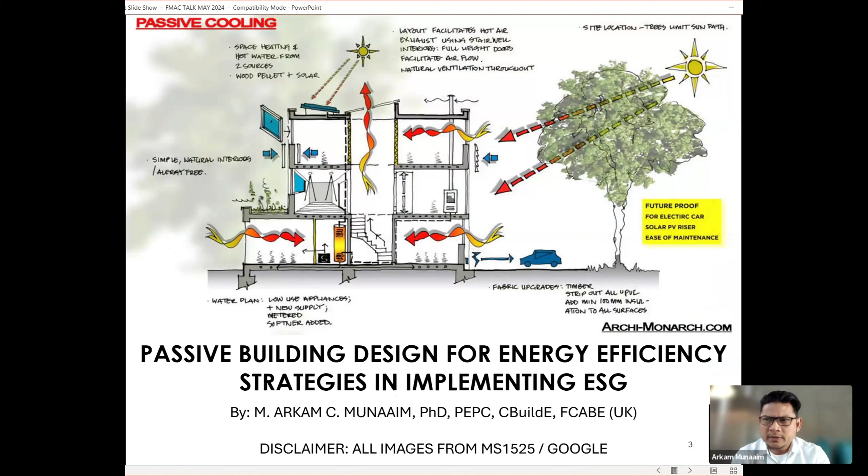So here's the topic again, just to give an insight into what we'll cover. First, we need to talk about passive building design, particularly focusing on energy efficiency. But our main theme today is really regarding ESG. So what is ESG? This is a standard definition you'll get if you Google ESG. One of the aspects is green building design and operation, and climate risk mitigation. Related to that, we can talk about energy efficiency, water conservation, emission reductions, and waste reduction. This is all related to environmental issues regarding the operation of buildings, not only operation but also construction.

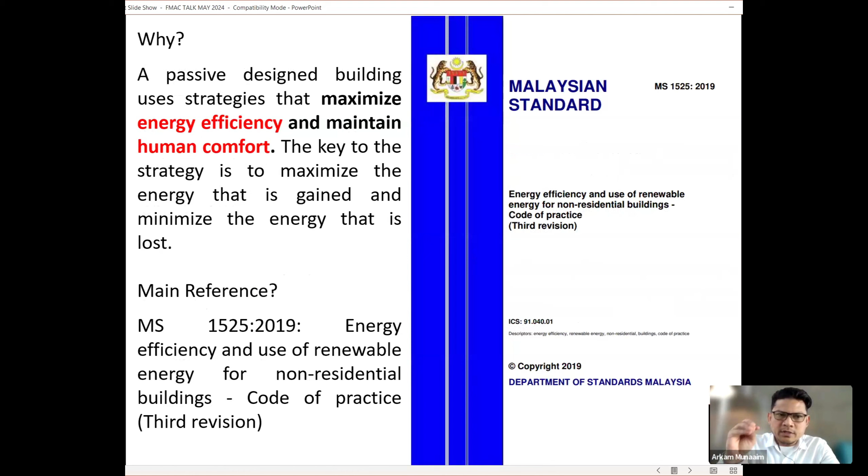So we will talk about these two more - energy efficiency and also human comfort. Talking about human comfort and indoor environment, perception about the indoor environment is closely linked to health, well-being, and productivity. Research has been made to prove that human comfort in a building is very significant to the health, well-being, and productivity of our occupants or us as building users.

Improvement of comfort level in a building has a significant positive impact on occupants. Human comfort in the indoor environment can be assessed in two ways - we have at minimum two comfort zones. Actually there are many, we can put 4, 5. Some books refer to 5, some refer to 3 and 4.

But I will just focus on these two because the topic related to EE today: thermal comfort and also visual comfort. Thermal comfort takes into account a range of environmental, work-related, and personal factors when deciding what makes a comfortable workplace temperature.

So we want to make our temperature or workplace temperature close to human comfort. Human comfort ranges because it depends on human activities. Sometimes my comfort may be about 23 degrees C with aircon, and maybe 27 degrees C without aircon.

Other persons might have a different comfort zone, but we need to be as close as possible to the majority, so that some of the minority discomfort can be adjusted through work-related and personal factors in deciding what makes a comfortable workplace temperature. So what is the comfortable workplace temperature?

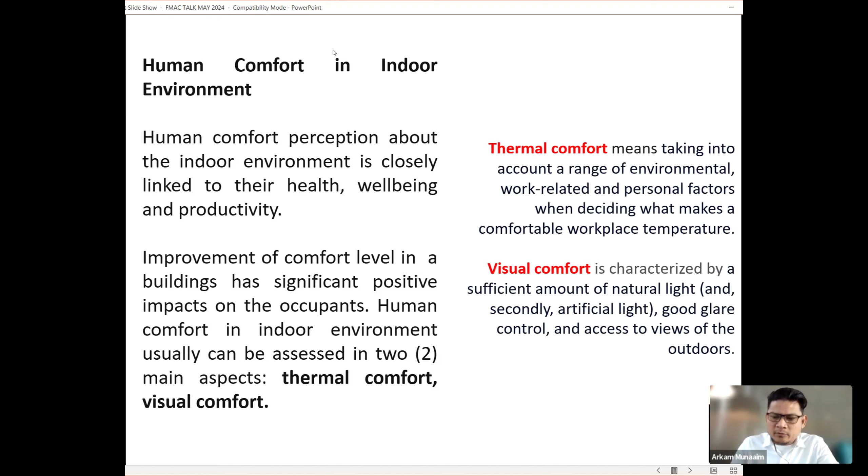So I believe they will share good insights coming from research about this topic. Then we need to understand what is actually the tropical climate, because tropical climatic conditions play a role in influencing how we make our own design. There is also a definition from Wikipedia: a tropical climate is the first of the five major climate groups in the Köppen climate classification, identified by a letter A.

They start with A—Af, Am, As, and Aw—related to the kind of tropical climate we have. Because even within tropical climates, each individual tropical climate also has its own specific characteristics or criteria not found in other tropical climatic conditions. Tropical climates are defined by a monthly average temperature of 18 degrees or higher in the coolest month, and feature hot temperatures all year round, like what we have now in Malaysia. In fact, in the last one or two months, we have had very high temperatures.

We can reach about 40, 41, 42 degrees Celsius here in Malaysia. Annual precipitation is often abundant, we have a lot of rain in this tropical climate, which shows a seasonal rhythm but may have seasonal dryness to varying degrees. There are normally only two seasons in a tropical climate.

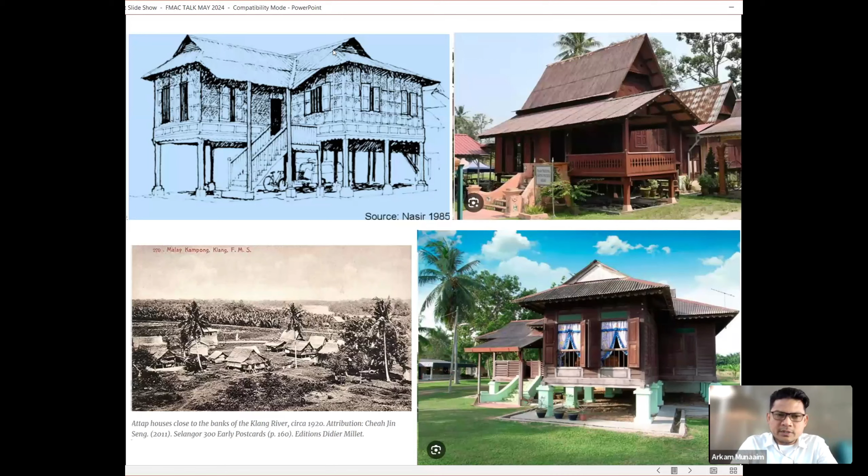So this basic design and understanding actually existed starting from close to 150 years ago. We can see this in the previous design of our houses. Here's a close-up of one of the houses, showing how it was built.

This is actually a modern picture of a fairly old house. We can see how it's put together, and at the back they started to construct a current practice, because now we have air conditioning to correct that part of heating. Other than that, it's still attached to the original building, and the second part was clearly just constructed less than 20 years ago.

This is what we can see from our previous generation, who made their environment part of their strategy for comfort at that point in time. Of course now we have more technologies, research, science and other features to add on, but for that particular time, this was a remarkable achievement for our previous generations.

So, there is some background to understand human comfort in home design. This is the current chart regarding the comfort zone. When we talk about the green area here, this is what we want to achieve: relative humidity from 20 up to 80, and temperature between 20 to 27, considered comfort. Other than that, we need to go for passive devices.

For example, starting by color here, passive solar heating. We need passive solar heating when we have this condition. And also we have the red one, we need to go for the cooling condition. So stop a while, I need to answer this call, very short one.

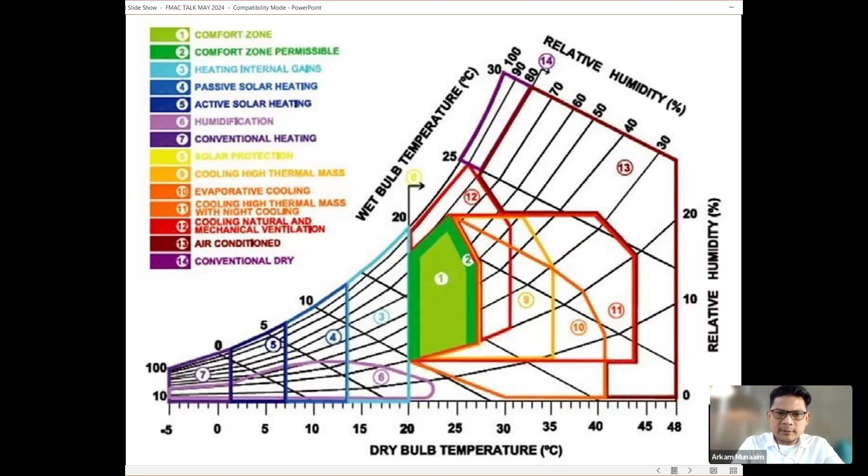Other than that, we need to add devices in terms of passive device to interact with the condition, so that we can get back the comfort by adding active devices. Okay, let me close this one too.

Evaporative heat exchange, direct evaporative cooling, for example. So here, what we can see is how we can use, for example, water pond and also vegetation to cool, to have cool air coming into our building or house.

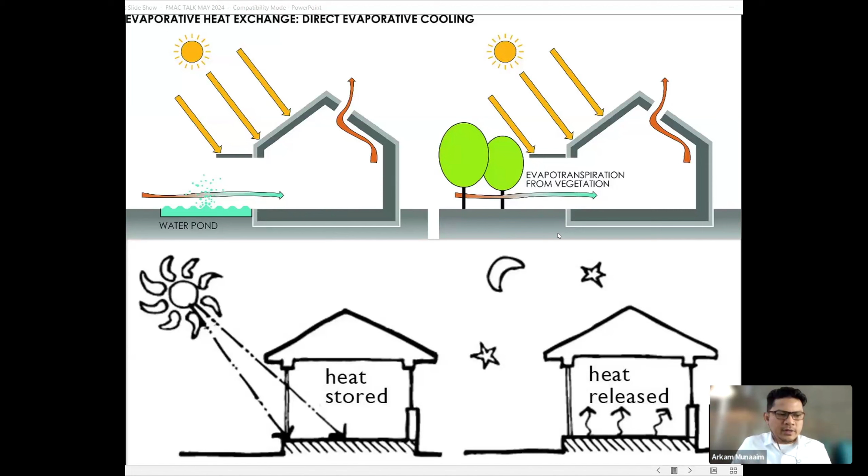And then it will be transmitted through whatever opening we have inside the building, particularly at the roof side. The cool breeze air coming in, and then hot air will be going up. So this is a sample of how we can reach passive design inside the building through evaporation, through water pond, or even vegetation. Very simple approaches and yet effective.

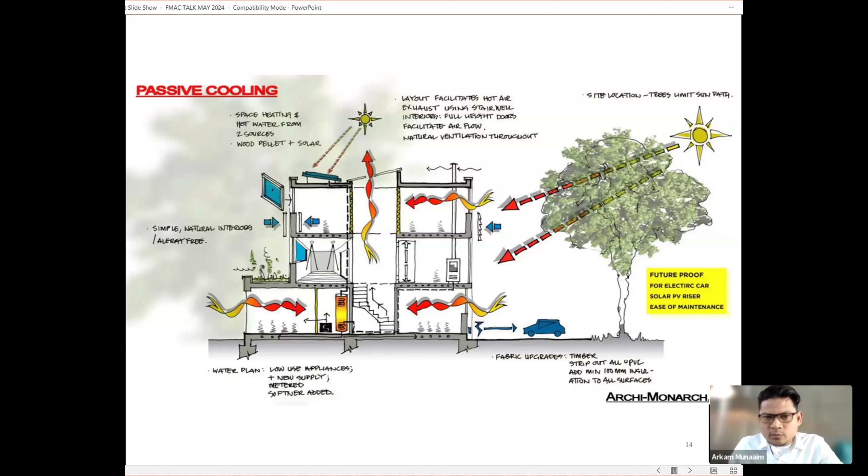Next, passive cooling also talks about how we want to implement the segment of the buildings and put it into a visual. There we can have ventilations everywhere coming through these windows, going up through stack ventilation, going out of the environment back. So things like this can be assessed, can be measured, and also can be designed. We have many simulations to do this part nowadays too.

Okay, glare control. Of course, we want to have good control in terms of glare. Things like bounce effect from the sunlight will affect our own comfort too. So this is how the things happen. We will discuss how to mitigate it in this session today. So this glare causes interruptions in terms of building comfort.

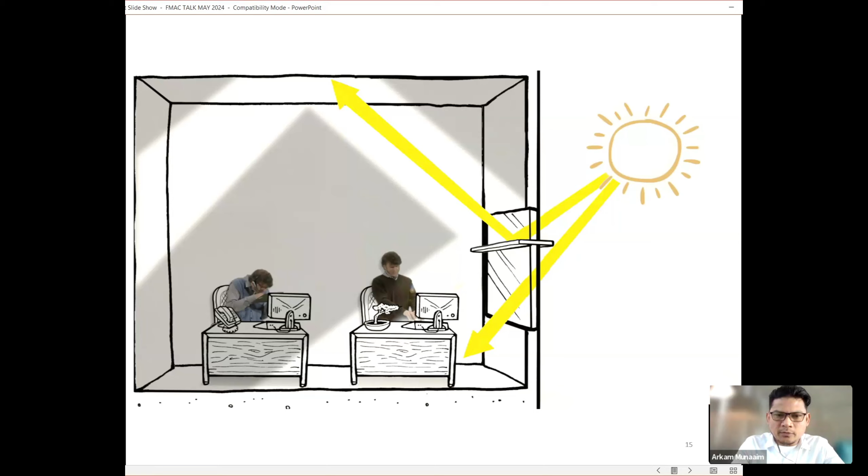Now, glare from artificial light, same thing. Our artificial light is so excessively bright that we cannot deal with it. Our eyes cannot deal with it too. So that is where we need to use the science behind it on how we can minimize these things.

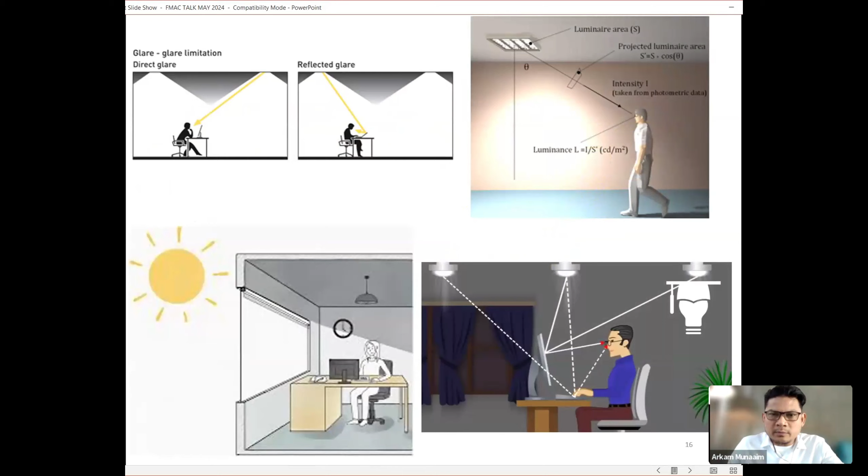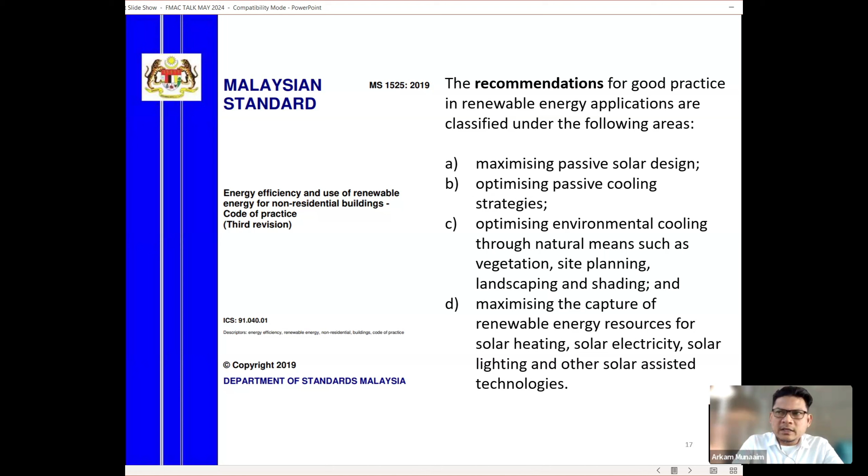We know about the recommendation for good practice in renewable energy applications, classified under the following areas. Maximizing passive solar design - we have four main strategies on how we can make use of the closest environment to our building: maximize passive solar design, optimize passive cooling strategies, optimize environmental cooling through natural means such as vegetation, site plan, landscape, and shading, and maximize the capture of renewable energy resources for solar heating, electricity, solar lighting, and so on. Even though some of the RE will also contribute into this ESG principle at the same time.

The requirement for EE, meanwhile, are classified under the following areas. So first of all, we talked about the recommendation on RE. This one is recommendation or requirement on EE, energy efficiency, classified under these following areas: design an efficient lighting system. Because according to research, about 80 to 90% of building occupants, not only building but whatever the building users, need to switch on the lights during daytime too.

80 to 90%, so there is a lot of energy that can be used. If you can have a very efficient lighting system, this can be minimized.

Minimize losses in electrical power distribution equipment. There are losses in terms of copper loss, efficiency loss, power factor loss. All those kinds of losses need to be minimized as well.

Design an efficient aircon and mechanical ventilation, because we just put the aircon there. We don't realize how to make it efficient. And secondly, go back to the users also. The users need to be wise enough to know how the aircon should be used.

Design a good energy management system that can be used or monitored through our own systems. There's a lot of software, a lot of programs sold to monitor our energy management system. They have a dashboard to monitor all those.

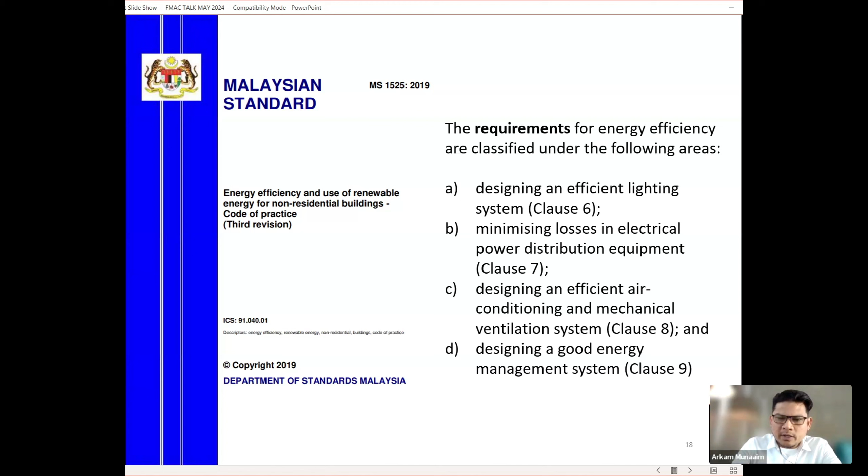Okay, then we go back to the sustainable design approaches. We talk about architectural and passive design strategies. Design within the contextual climate and site as the first step to optimize the benefit provided by the specific environment.

So first of all, we need to understand what is the specific environment that we have at that particular area. For example, here in Malaysia, from Perlis to Kota Kinabalu, from Perlis to Sabah, what we can see from the specific nearest environment there.

So design based on this contextual climate - the context of the climate that we have to deal with on how we can put it into our design.

Design solutions shall strive to achieve energy efficiency and use environmentally friendly material of higher quality and durability in order to decrease waste. So waste in these terms is really the electrical wastage. Electrical wastage comes from the inefficiency of any of the devices that we put inside the building.

This is actually a combined architectural, engineering, site planning, and landscape approach. It's a holistic approach to design an efficient energy building, which would optimize the energy efficiency of the building - especially when employing combined passive and active devices.

So what we want to do now, if we understand the contextual climate with the specific environment that we have in that particular area, is go for a combination of architectural approaches, engineering approaches, site planning, and landscaping, putting everything together as a holistic approach to design the building.

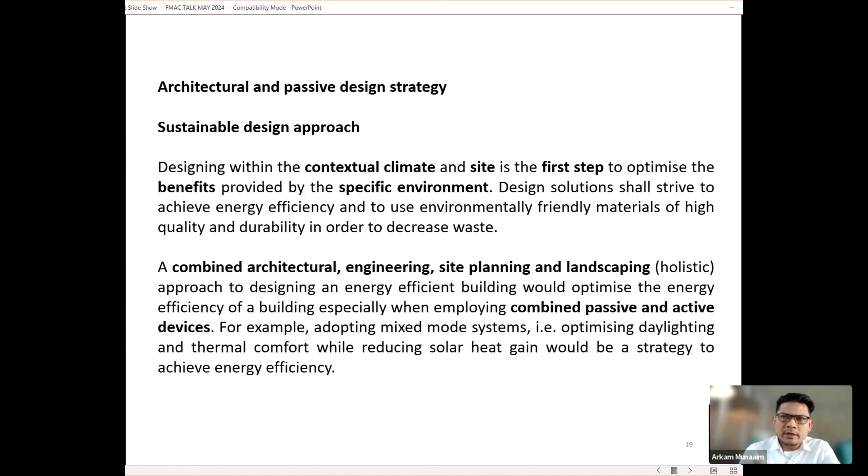So solar heat gain comes together with natural light and daylight. So how do we want to remove the solar heat from the natural light? There are measures, there are strategies to add so that we can reach that, because we want the light intensity as close as possible to whatever is permissible and required. But at the same time, we want to try to remove the heat that comes together with that light. So the idea and approaches need to be very coherent so that we can have both simultaneously.

Okay, basically the basic approach towards good passive design is to orientate. First of all, of course, we talk about building orientation - how to orientate the building nicely according to the sun path. We will look into the sun path later.

And we need also to put landscape shading, on how we want to shade it, even with vegetation or architectural devices, architectural finish, or architectural facade, to insulate also. Insulation for the wall panel - I can see there's not much practice here, but on the roof there's insulation that we always put in, to ventilate and also to daylight a building.

So the basic approach, first of all: orientate. We put shade through the landscaping. We insulate, we ventilate, and we daylight the building. So this is about 5 approaches just to reach whatever comfort that we want according to the basic requirement or basic criteria.

Buildings have a primary function to provide an internal environment suitable for the purpose of the building. The first step is designing the building to meet its actual purpose. For example, a hotel room will be different from a sports center. The purpose needs to be understood first so we can apply passive design strategies according to the purpose of the building to be developed or constructed.

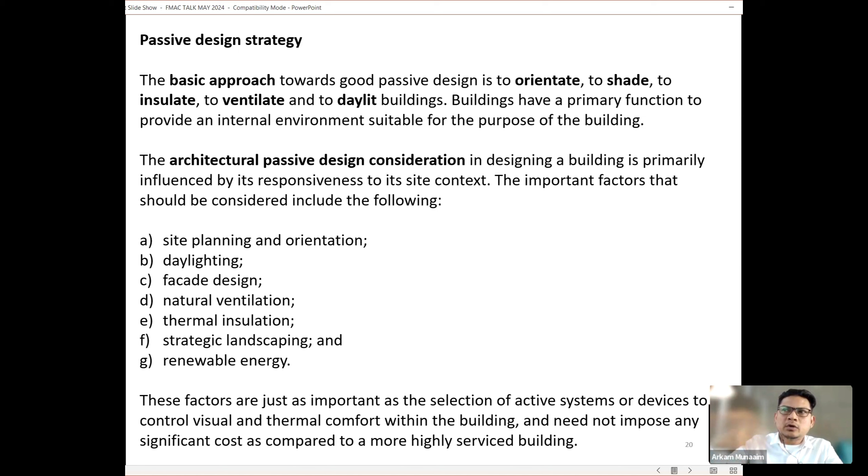This is also a new concept. We don't want just a casted building with no emotional feeling at all; we need to make it live. Once it's living, we can have coherent communication between living people and living buildings, rather than communicating within living people to a dead building. This approach is now becoming common in many countries, where buildings are considered as living things as well.

So thermal insulation, strategic landscape, and renewable energy also have to be put in, but we don't want to focus on RE in this topic today because we want to talk about energy efficiency only. These factors are as important as the selection of active systems or devices to control visual and thermal comfort within the building without imposing any significant cost. Some of these approaches don't impose any cost at all; we just need to understand how they behave and implement them in our building.

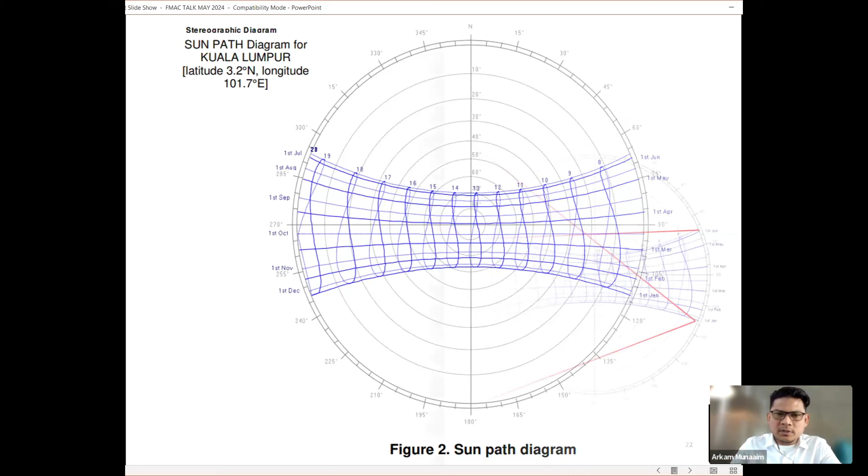The same pictures taken from the same angle, different months. You can see the sun is actually moving. Of course, they come back to the original position and start again - January, December, January, December. So things like this are actually happening without us realizing it. Sometimes we don't realize it.

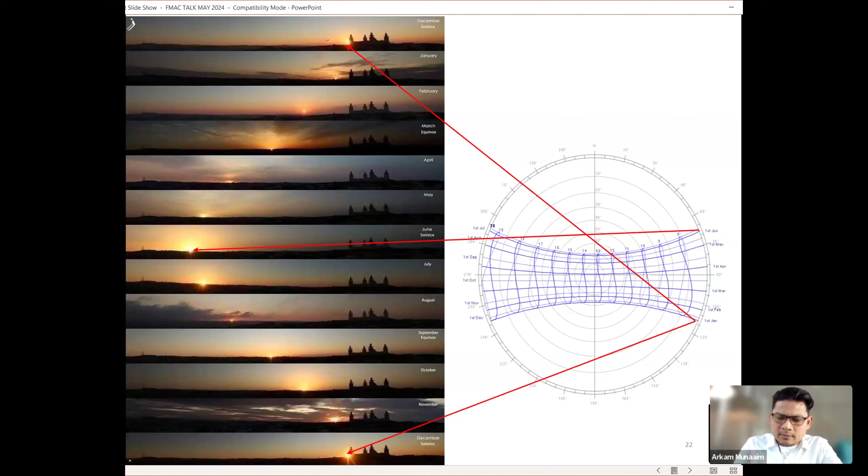For those in this field, research, or talking about building strategies on passive design, for example environmentalists, you will notice. But most of us don't notice anything. They just know the sun is there every morning at 7:30, and will disappear at 7:30 in the evening. So we need to change this so we can appreciate more what's actually around us, so we can make use of it as strategies in our work.

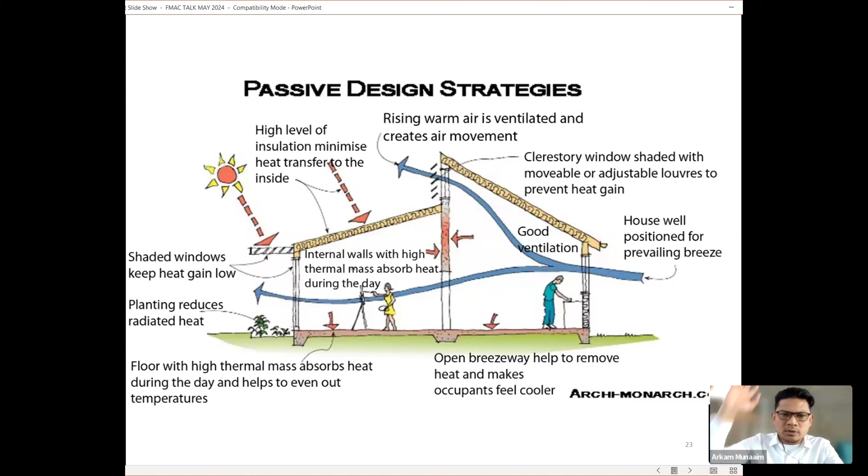Okay, so this is very, very important to understand how we want to orientate the building based on this kind of sun movement. And passive design strategies also talk about these areas. I don't want to read everything, but I've explained a few of them. We're talking about insulation, cross ventilation, good ventilation, vegetation, landscaping, human activities, how heat can be dissipated through the opening. This is most likely talking about air change only.

Here again, we talk about equinox on 21st March and also September 23rd. We're talking about where the sun is moving, and our location on earth. So there is a time where we are so close to the sun, about 147 million kilometers, and there is a time also we are far from the sun, about 152 million kilometers. So that also creates another understanding.

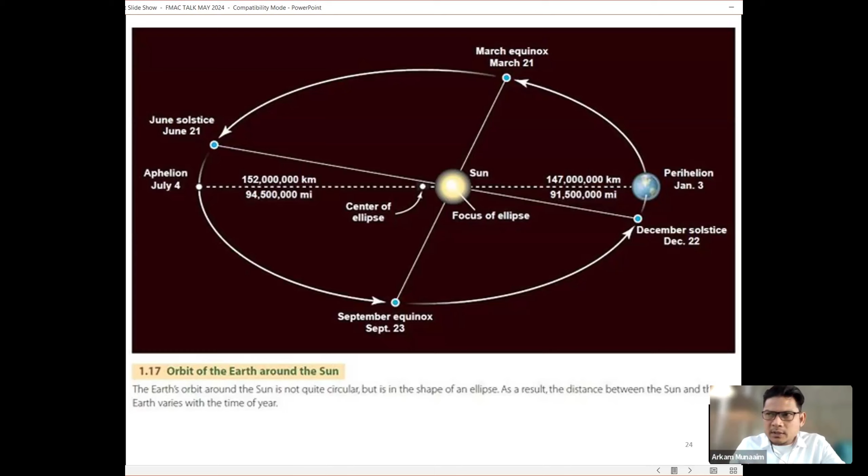We can have a very hot season and cool season for our climate, and for those living in the four-season areas, they will experience more varieties in terms of their environment due to this sun and earth positioning.

While we understand it, here in Malaysia, this is how our sun path looks like. For those in the UK, the sun is actually on the south side. For those in New Zealand, the sun is actually on the north side. So facing it, orientate the building based on this climatic condition - it will be based on where the sun position is on our globe. That's why understanding sun positioning is very, very important.

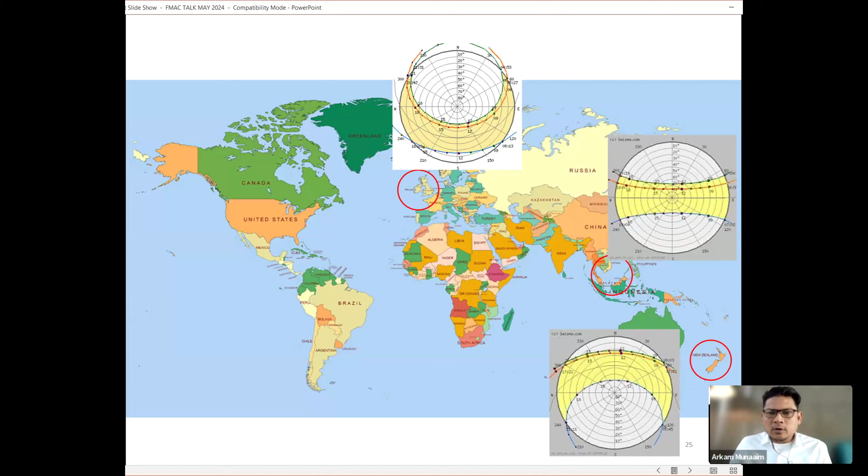Not only us, the trees - pokok - also look for the sun too, so they will grow straight. If you're involved in landscaping, you will know. The trees also look for the sun rays. Same goes for humans. So now we understand it, and we'll try to impose it in our future design, so we can understand what we are actually talking about here.

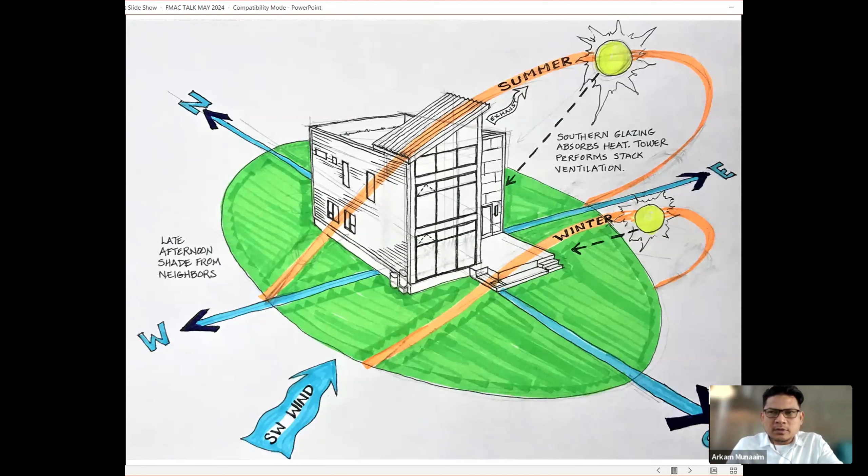Of course this is not from here because they have winter and summer, but the thing is how they orientate the building based on this condition, to understand the location of the sun during that time, so we can make things happen. So ancient civilizations also referred much to the sun movement - not only sun movement, they understood how to position things, particularly to get a very good time to work on it.

Okay, not only sun, we're also talking about heat. The sun also influences global wind, because wind originates from the heat and cool areas. Heating and cooling both create global wind. So the rotation of the earth - we read from the top - the sun powers the wind by heating up parts of the earth more than others. Wind is the movement of air. The sun heats the air, and the warm air rises. The causes of global wind are: first, the rotation of the earth; distribution of continents and oceans; heating of earth's surface by the sun; and also differences in atmospheric pressures.

So the wind's movement also depends on the sun, the intensity of the sun. Basically, the sun is the source of living - everything is actually referring to the sun to make sure things like this happen on our earth.

So the cross ventilation is one approach. I understand the wind - some places also have a very consistent wind flow.

So they can make use of wind turbines in areas with consistent wind flow, normally on the north side and the south side, where they have very consistent flow in a uniform direction throughout the year. For us on the equatorial side, our wind actually goes everywhere, coming from the top, coming also from the north. That is why wind turbines are not popular here in Asia. Some other places have a very unidirectional wind flow, so that is where they can put the wind turbine.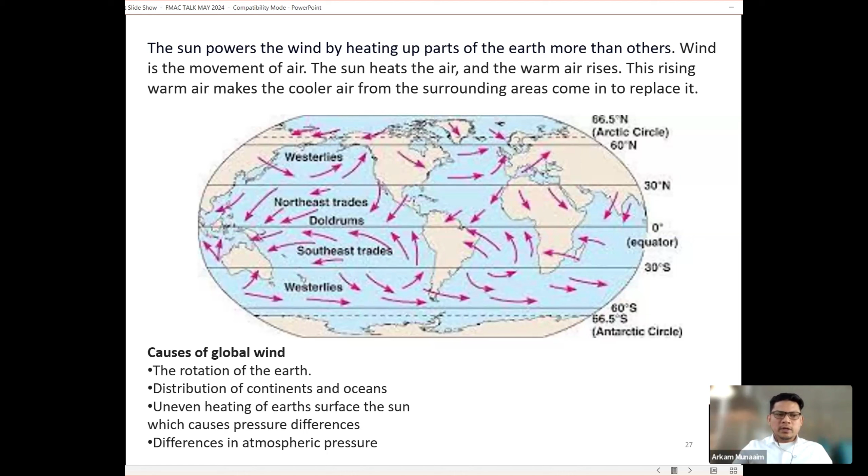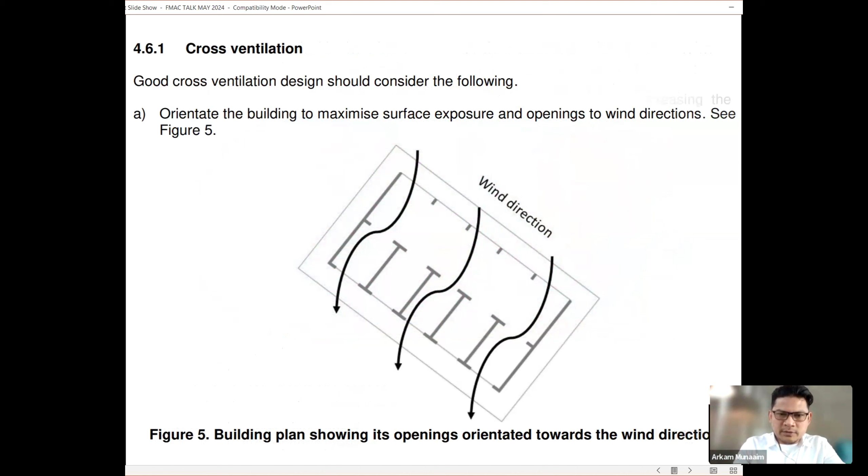So now we can make it an advantage in our design - cross ventilation, how we can invite the wind from one direction and show the way for the wind to flow in another direction. These are two things in passive design strategies: stack ventilation from the lower inlet to the higher outlet, understanding how air passes through our buildings or rooms, and how air movement impacts our sensation. For example, we have air speed below 0.25, and this is the effect and sensation we can sense. I don't want to read everything, but you can have this slide later.

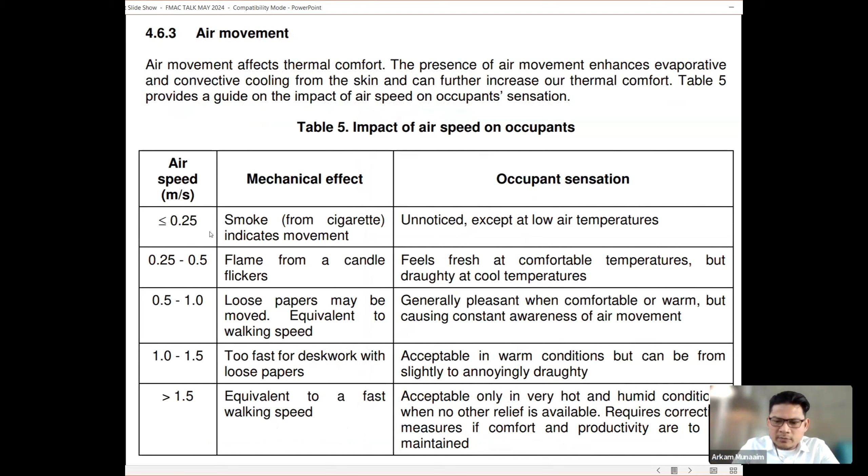Strategic landscaping - we're talking about how we want to involve the landscape inside our design, in either new construction or retrofitting buildings, on how we can put the landscape influence into the building mix. Building needs to be treated as a living thing, so we want it to blend and interact with the environment, and the environment needs to be there to interact with the building. So we're talking about landscaping and all those kinds of passive strategies, while at the same time we add passive design strategies to improve the efficiency of buildings.

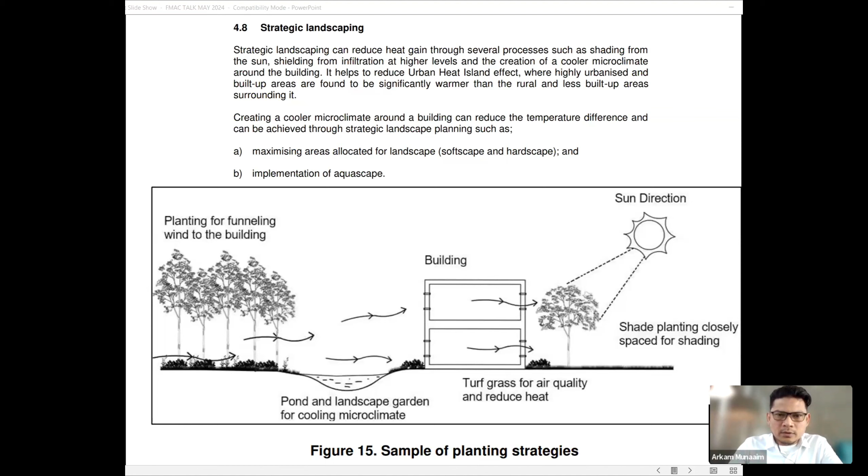Knowing the direction of wind circulation and the sun path at a specific location - design within the contextual climate and site is the first step to optimize the benefits provided by the specific environment, as mentioned before. A combined architectural, engineering, site planning, and landscape holistic approach will optimize the energy efficiency of the building, especially when employing combined passive and active devices. This is what we call sustainable design approaches, some of which will also be influenced by ESG, related to today's theme. Passive design strategies plus active devices give us sustainable buildings at our place. Understanding the overall science behind building science or environmental science will assist us to create better building conditions, with more strategies to make it efficient for our daily use.

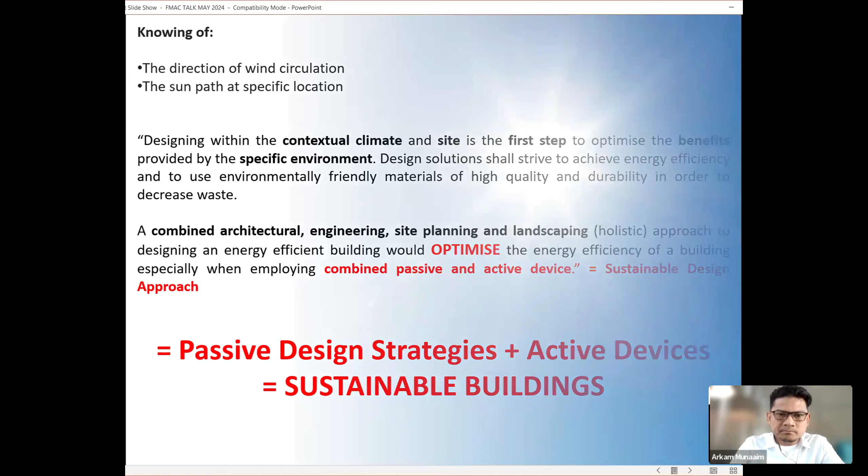Sunlight - these are some strategies related to how we want to control the light. Remember, daylight from outside is very important for the interior of the building. It comes with three main components: light intensity, talking about lux; solar radiation, in terms of irradiance level, watt per meter square; and also heat coming together. We don't want these two - we just want the light. There are many strategies on how to remove these two.

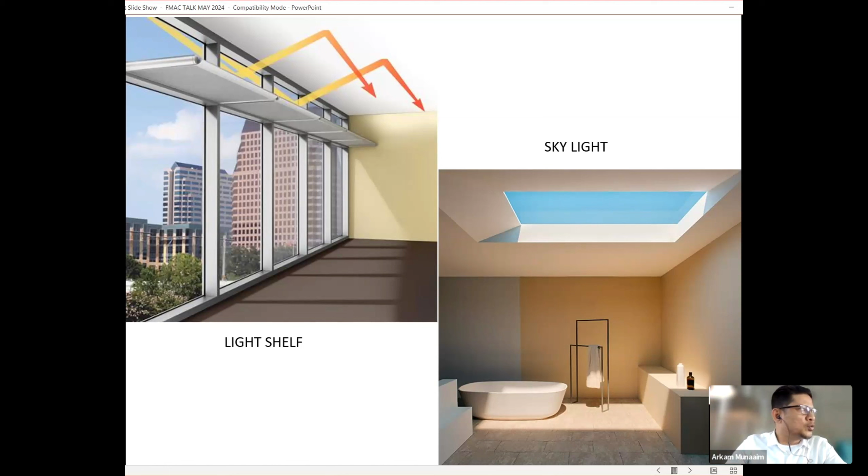One strategy is to use the light shelf to bounce light from outside to make it more stable, not directly there. We can also invite light through skylights, but of course we need a good infrastructure to remove the heat from the skylight directly. Some countries might invite the light straight away because they're not like our country - their highest temperature might be about 22, 23, 24 degrees, so they can invite direct sunlight inside the buildings. But for our countries, that cannot be done that way.

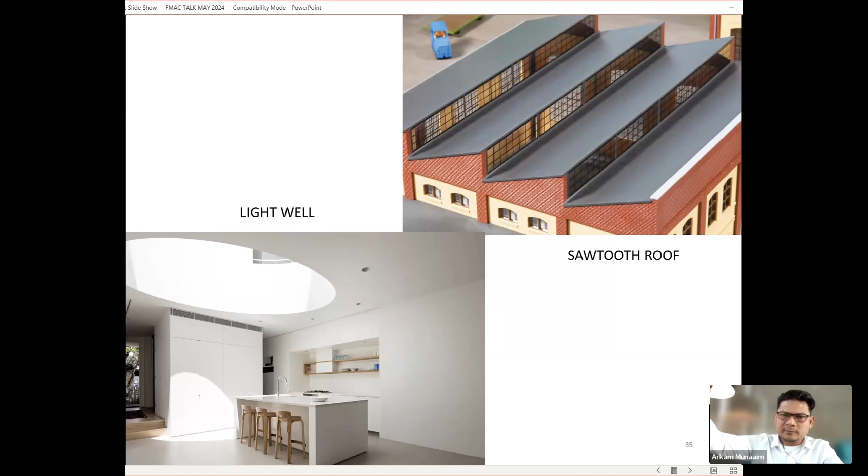A light well is also one of the strategies where we can invite light through the light well from the top through the interior of the building. We also have a sawtooth roof, which is very popular in the north and south hemispheres because the sun is moving from the south or the north side. This is shown in the pictures here, from the UK side for example, and also from the New Zealand side for example.

So the sawtooth roof is very popular over there, popular because it can invite light through this kind of roof setup. But it's not popular here in Malaysia, even though there's also construction using this, they just invite the light coming from the sky.

Okay, we can have a roof monitor. A roof monitor is very popular, we have this many in Malaysia. We have also an atrium. Atrium is also a strategy to invite daylighting inside the building through passive strategies. It's part of the passive strategies too.

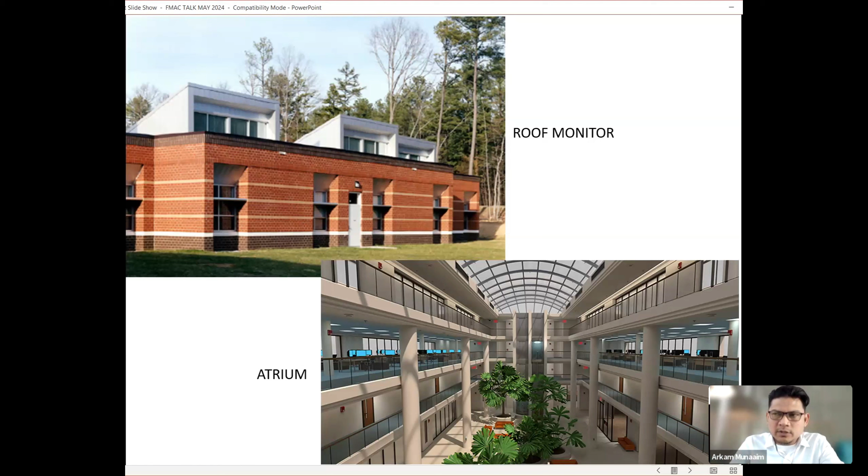But again, when we talk about atrium, there will be other components coming together with the light, which is the solar radiation and also the heat. So how do we want to control it in terms of getting what we want from the light intensity, but we don't want the heat and the solar radiation? So things like that can be explored.

Okay, this is actually a solar tube, where they have a dome glass outside the building, and we have the tubing to diffuse the light inside the building like this, for example. So this is the outdoor dome, and there's a reflective tubing inside it, and it will reflect inside the building. So this strategy can also be used because we will cut off the heat coming through the tube.

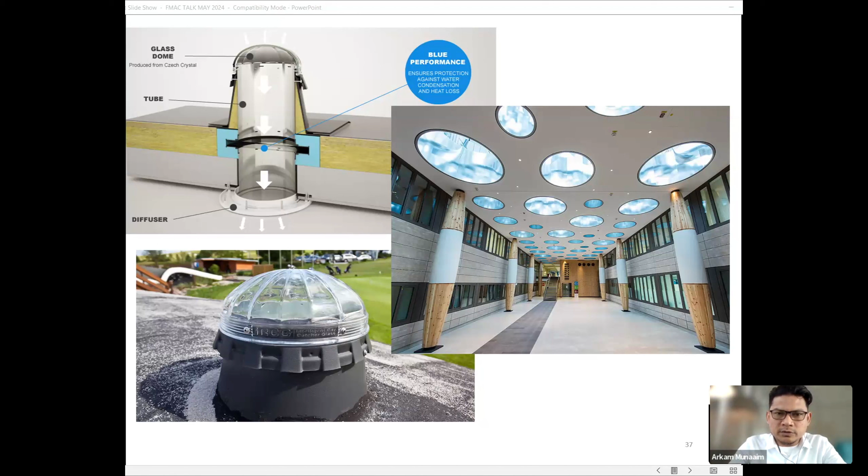I made this project about 8 years ago at Plus Highway, the office building. So we invite this kind of technology just to bring light into the area where we need sunlight while we don't have the opening, talking about windows and doors. So to make it inside the building, this is something that can be done too, but with some limitations of course. It's good technology to be explored.

And a solar tube just now, this is the same thing, a solar tube. It consists of a small glass or plastic dome shape mounted on the roof to collect sun, and there is a polished aluminum tube extending from the roof to the ceiling. Solar tube skylight lets in a lot of light from a rather small opening, much smaller than standard skylights, thus reducing the amount of heat. So be aware of how we want to deal with the heat and the solar radiation, because we can invite the light, but it comes with other components too.

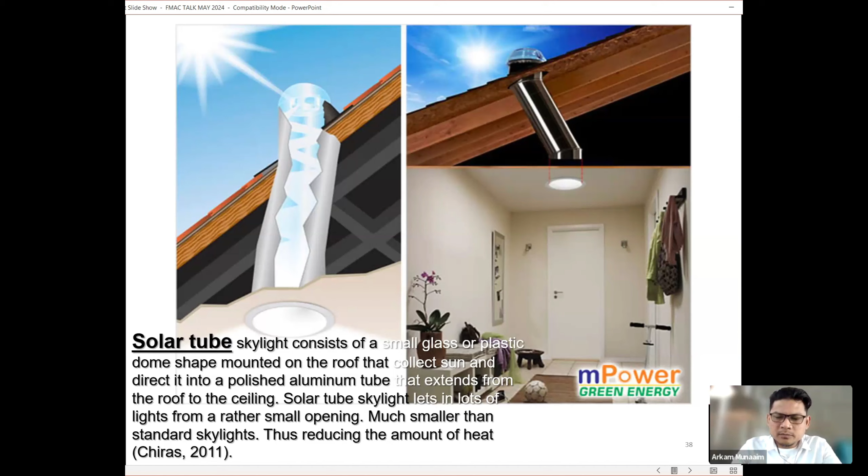So this is an example of how it can be very useful, especially where the location of the room we want to illuminate is far, or in the middle of the building, where it cannot be reached by any of the building envelope directions. Solar lighting.

Thank you. And also the comprehensive approaches on how we can go for building maintenance, or building efficient monitoring, by having all those systems and technology inside our building.

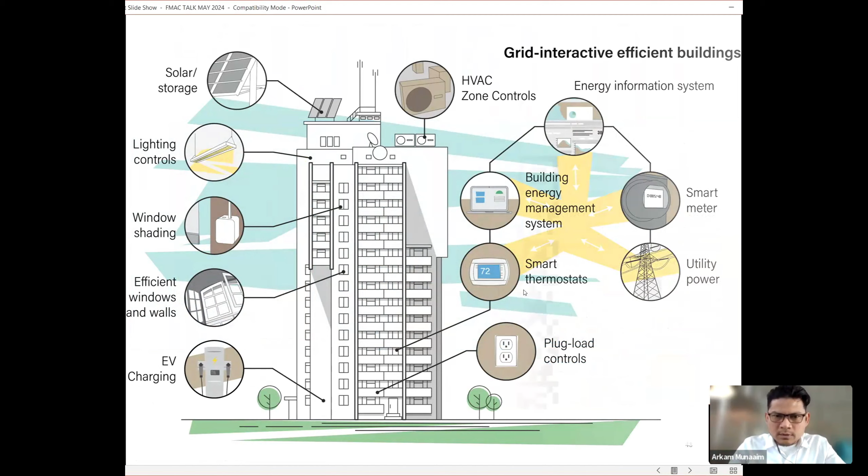Okay, just to conclude before we end the session, passive design strategy is actually part of the very useful approaches when talking about implementing ESG inside the building. So what we want is to encourage the design, construction, operation, and maintenance of new or existing buildings, and maybe reduce the use of energy without constraining creativity. We don't want our building to be very plain, with no elements of art at all. We don't want to constrain the creativity.

Just to put materials as one of the important parts, and we have the mindset of energy efficiency in the sense to comfort or productivity of the occupants and appropriately deal with cost consideration, provide the criteria and minimum standards, provide guidance for energy efficiency design, and also encourage the application of renewable energy in new and existing buildings to minimize reliance on non-renewable energy sources.